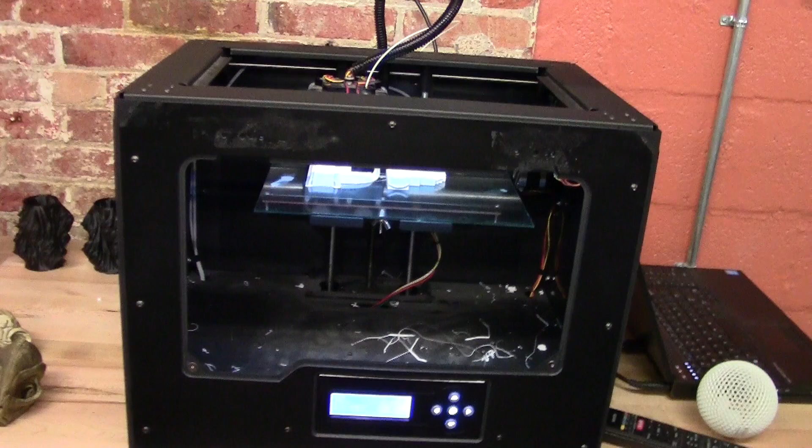So you've probably heard about 3D printing from a family member, a friend, or in the media somewhere, and you've heard pretty much everything. You've heard that 3D printing is going to change the world, it's going to disrupt industry, and we're going to talk a little bit about the realities. What really is 3D printing?

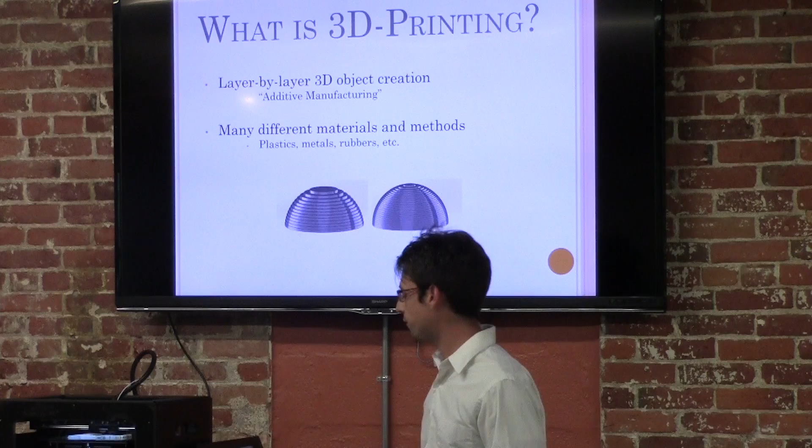3D printing is just a kind of buzzword. It's a catch-all term for a bunch of different additive manufacturing processes - additive manufacturing versus subtractive manufacturing. With subtractive manufacturing you can start with a solid block of wood, metal, or plastic, stick it on a mill, and chisel away material to end up with your final prototype. With additive manufacturing, you add material layer by layer to produce your final model.

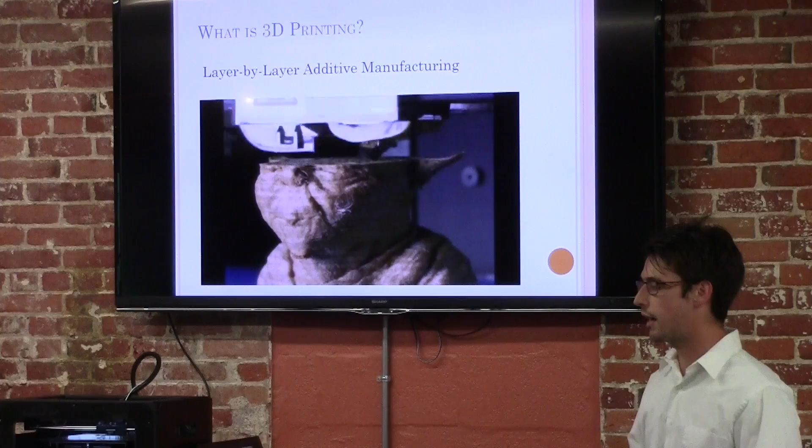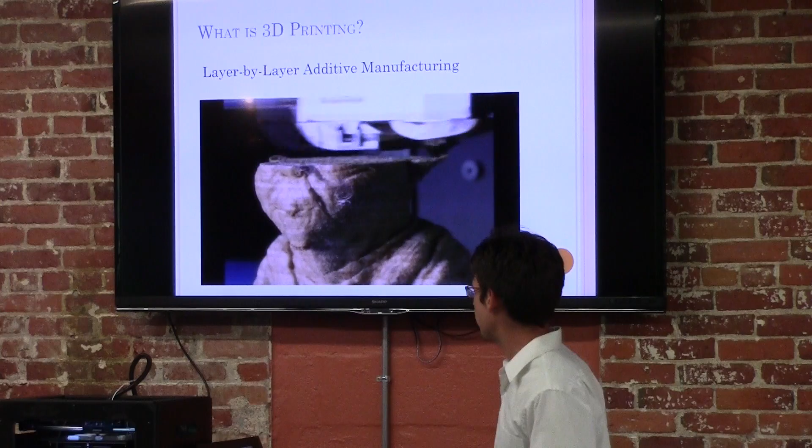So 3D printing is just a catch-all term for a bunch of different additive manufacturing processes that print layer by layer - you're adding one layer right on top of another. In this demonstration video, you're seeing a printer very similar to this one. It's highly sped up, and you're seeing it lay down layer by layer on this Yoda bust to fully build up the model. It's been sped up probably about 100 times or more - 3D printing is not particularly fast.

So why does this matter though? What's the big deal about 3D printing? Well, because creating precise three-dimensional objects with a lot of different design features has traditionally been incredibly difficult and takes a long amount of time. So with 3D printers, you can, with one tool, produce almost any geometry that you can think of. Maybe not any geometry, but almost any geometry that you think of.

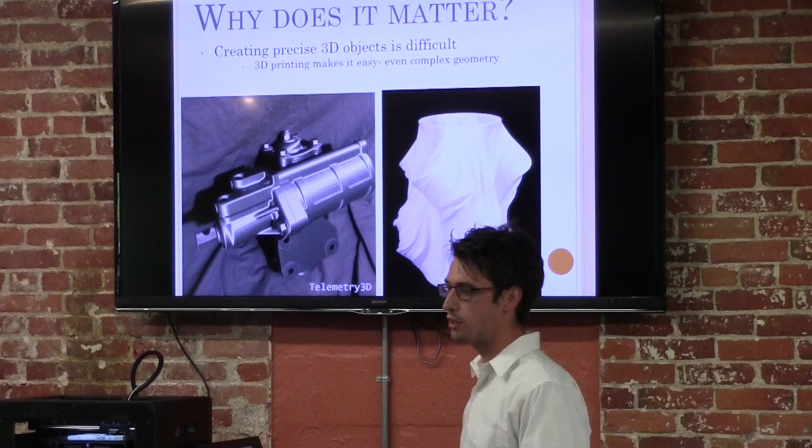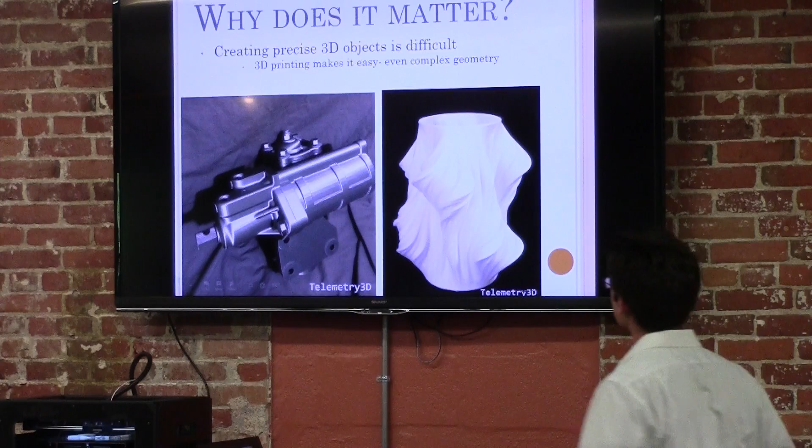So before, where you would need dozens of tools and dozens of technicians to produce a functional prototype, you can now do that with one machine, with one skilled operator. And you can print high amounts of detail with these printers. So things that you could only do by hand in the past, you can print with extreme amounts of detail with the various processes.

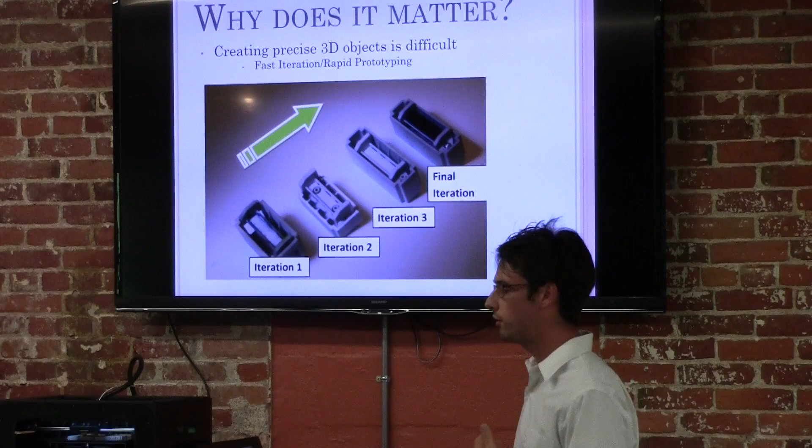So again, why is 3D printing important? Well, the most important aspect of it is the compression of the design cycle. So before 3D printing, you would come up with your design, you would send it out to be prototyped, and it would take several weeks to get your models back, only to find out that you missed a design feature that needed to be fixed, and then you fixed it, sent it back, and a few more weeks later you got your prototype again.

Well, now with 3D printing, you can come in on Monday morning, you can make your design. If it's small enough, you can get it started Monday night, walk into the office Tuesday morning, and you have your first iteration done. Oh, you made a mistake. You fix it, you get it printing again. Wednesday morning, you've got your second iteration. Maybe by Friday, you've already got enough iterations, you've got a final model that's ready to go for being made into injection molds. So 3D printing compresses the design cycle, and it's accelerating innovation by allowing people and companies to move a lot faster.

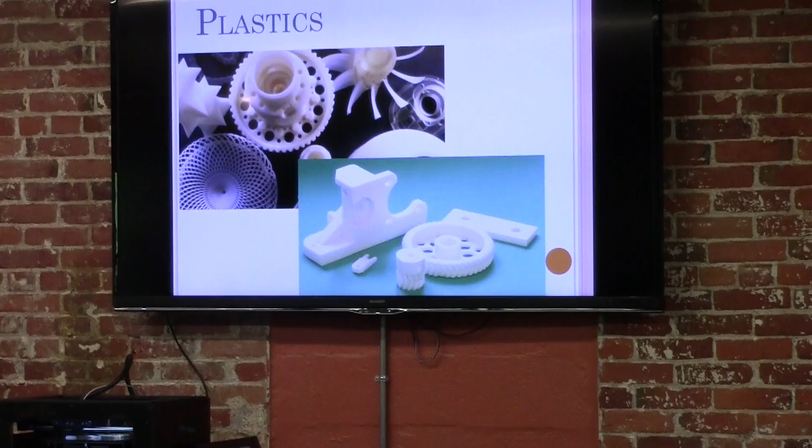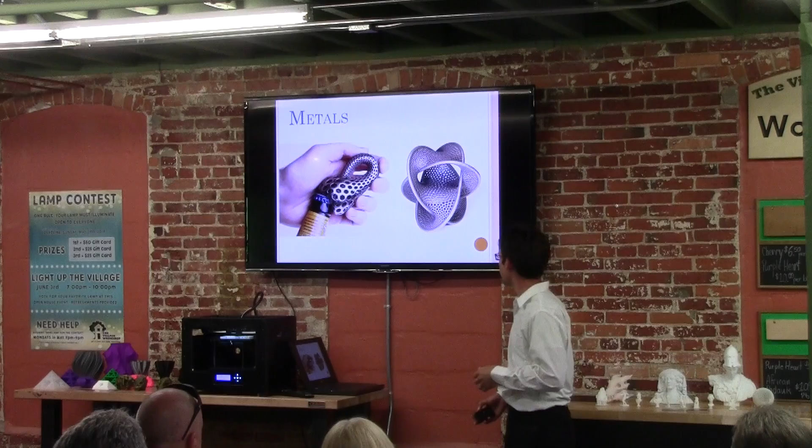So 3D printers now can print into a large variety of materials. What you'll probably be mostly interfacing with are 3D printed plastics. All of the examples that we have here today are 3D printed plastics. And there's a wide variety of plastics that are available for 3D printing, and they all have their own strengths and weaknesses and their own specific chemical properties. You can also print directly into metals with a metal sintering printer that uses powders and a high-powered laser to sinter metal powder together. So you can print directly into metal, flexible materials.

People are actually learning how to print collagen and the materials in the extracellular matrices to print the structures of organs, which are then seeded with stem cells and placed in conditioned media to try to actually grow functional organs. And people are even making 3D printers that can extrude concrete and create concrete forms and actually build houses. That's a little bit larger of a format, but it still kind of falls within the realm of 3D printing.

Now, there are a large array of processes that fall under the umbrella term of 3D printing and additive manufacturing. But broadly speaking, there's three processes that they fall within, and that's selective binding, selective solidification, and selective deposition. So let's take a look at those.

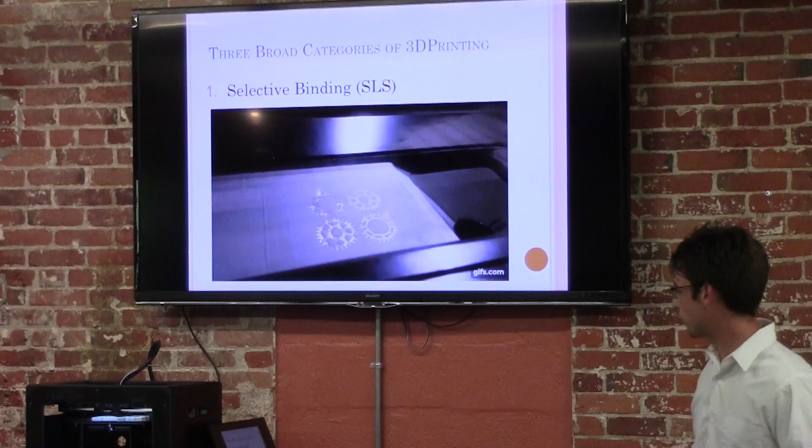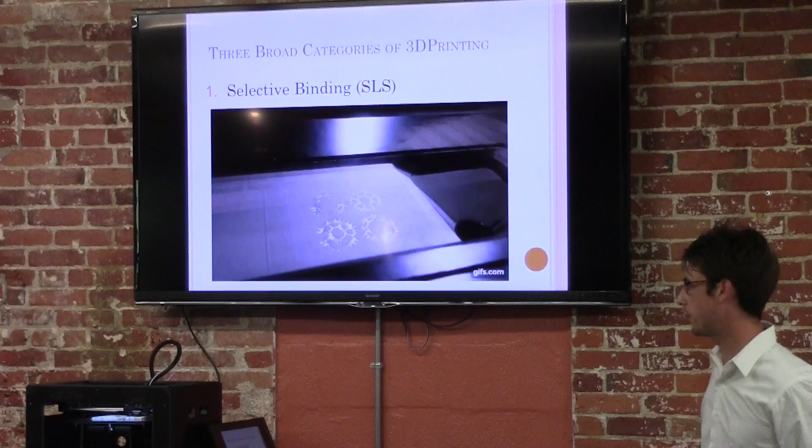So with selective binding, you're generally going to be starting with a thin layer of powder. It can be powdered plastics like nylon, it can be metals, it can be titanium, there's a large amount of different powders that you can work with. And then a high-powered laser comes along and it fuses those particles of powder together. And then the machine spreads out another thin layer of powder, and then a high-powered laser comes again and sinters the next layer to the previous layer. And it does that until you build up your final model.

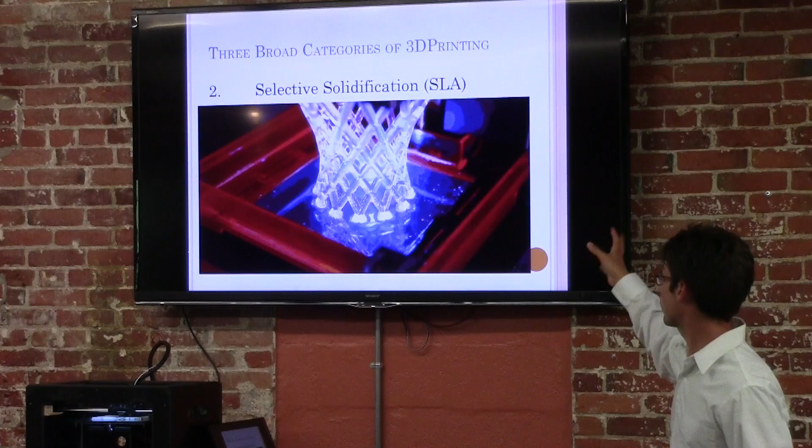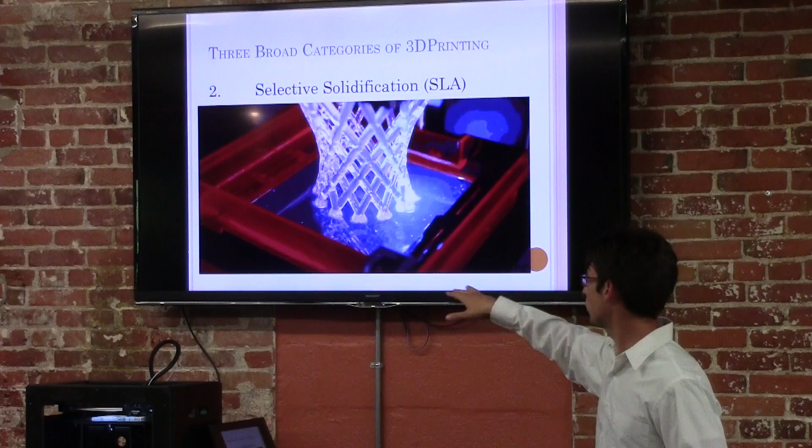So that's selective binding. Selective solidification, a stereotypical process for that is SLA, stereolithography. This is actually the first 3D printing process that was patented, in 1984. What it does is it uses a UV laser to cure a liquid resin in a vat. So it's selectively curing or selectively solidifying layer by layer by layer.

And then there's selective deposition. This is what you're probably most familiar with. This is the sort of technology that this printer uses, fused filament fabrication or fused deposition modeling. It just uses a plastic filament that is pushed through an extruder and through a hot nozzle, and then laid out layer by layer to build your object.

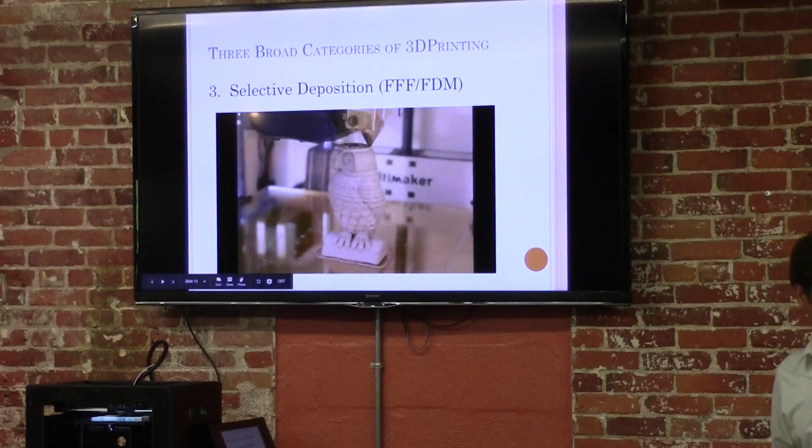So I said that 3D printing falls under 3 broad categories. Well, there's so much development that's going on in the field that's not exactly true. It's generally true, but it's not exactly true. There's new 3D printing technologies that are being developed all the time, including 3D printers that actually take pieces of paper to create your 3-dimensional object.

So it'll take a piece of paper, it'll cut a tool path around it, put a small layer of glue on top of that, put another piece of paper on top of it, and cut out another tool path. And it'll repeat that process until you've produced an entire object made out of paper. So there's going to be unique strengths and weaknesses to each of these technologies. And that's something you're going to want to consider if you're thinking about using 3D printing in your workflow.

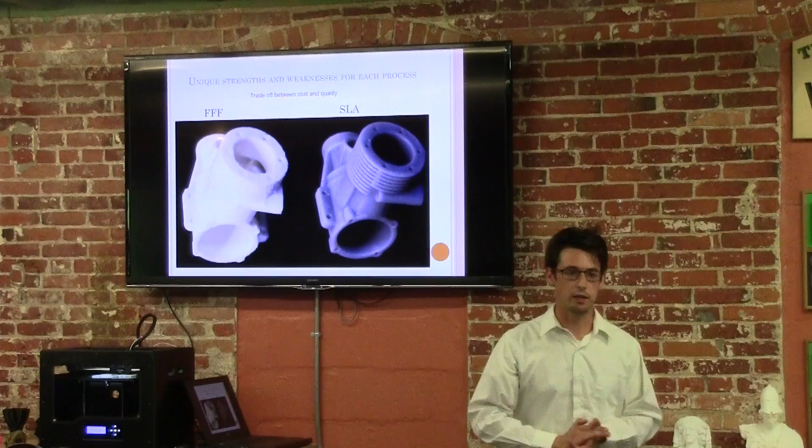Because obviously there are technologies that are available at every price point. So if you don't have a lot of money to spend, you might want to go with a lower resolution prototype until you've worked out your final design. So there's strengths and weaknesses you're going to want to consider between the different methods. And then within each technology, you can often choose the resolution that you want to work with. So lower resolutions will print out a lot faster and tend to be a lower cost, but obviously you start getting some layering artifacts. So it's something that you want to consider.

So again, it's building up layer by layer by layer. The more layers that you have, the finer details that you can resolve, but the longer it takes, and therefore usually the more expensive the parts become.

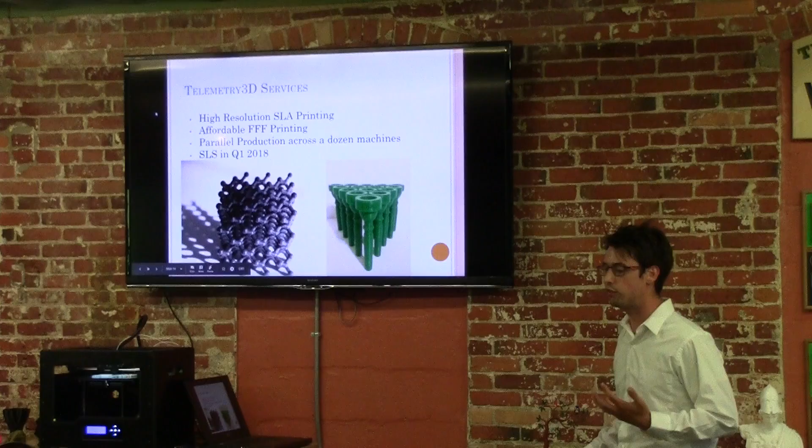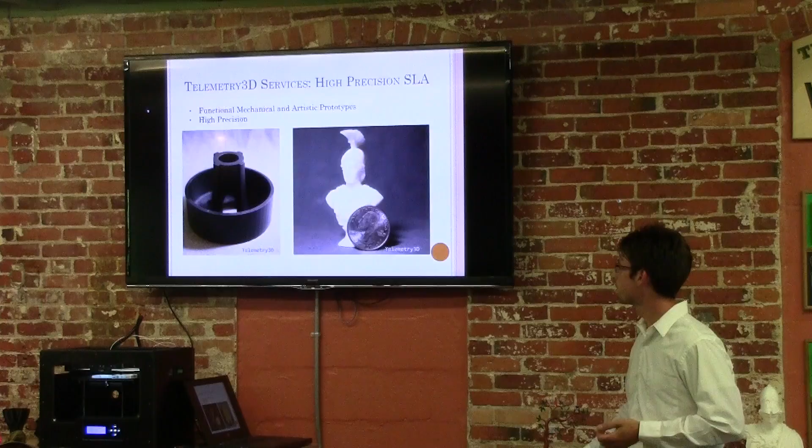So at Telemetry 3D, we offer high-resolution SLA printing services and affordable fused filament fabrication services, and our SLA is great for functional mechanical prototyping and high-precision artistic models. Our fused filament fabrication services are fantastic for very large mechanical models. It's a full prototype of the steering column there. But fused filament fabrication actually is really nice for small models as well. It just can't resolve the tiniest of details.

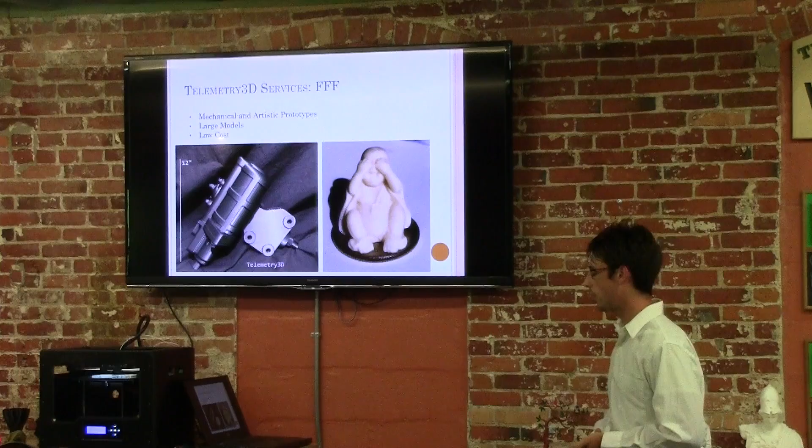So I'm going to go ahead and hand it over to Dan here. He's going to talk from a design perspective. Thanks, Josh. Hi, everybody. My name is Dan Ingerer. I'm with Brainchild Engineering. We're a product design and engineering service. We actually have our office upstairs. And we use Telemetry 3D a lot in our prototyping process to turn around parts really quick. In fact, we're going to be using this part tomorrow morning.

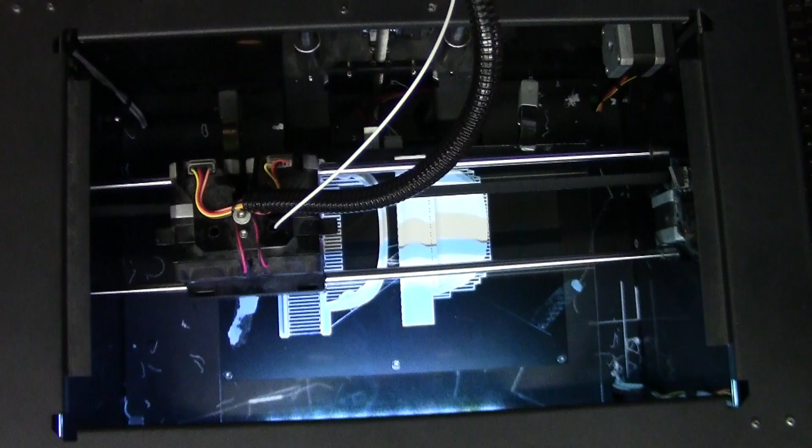So as much as we really love 3D printing, I wanted to talk about some of the limitations. Because right now you're probably thinking like organs, houses, what can I not print? Can I go make myself a toaster or a Rolex watch? So why can't you do those things? And I wanted to illuminate some of those challenges.

So first of all, one of the challenges is multi-material. So in your standard household products like a toaster, you've got maybe 5 or 10 different materials. You've got the thin sheet metal on the outside, plastics, the copper wiring, maybe a circuit board, all kinds of stuff. And currently, as it stands, you can't quite make all those materials in one print. You have specialized machines that can do plastic extrusion, selective laser sintering for metal, but currently there's no machine that can do it all just yet.

Now, that's constantly evolving and changing. There are printers out there that can do plastic and rubber-like at the same time. So, of course, ask me again in 5 years, and maybe you can make a toaster. But currently, it's not quite the Star Trek replicator kind of thing.

Next, material properties. So strength, for example, say you have a gear set, and gears are oftentimes heat treated because just normal plain mild steel is not quite strong enough. So you'll send the parts through a furnace and change the outer surface into an extremely hard material. You don't get that with 3D printing. You're not printing individual molecules, and that's something that's in the works, but again, not quite there yet with the technology.

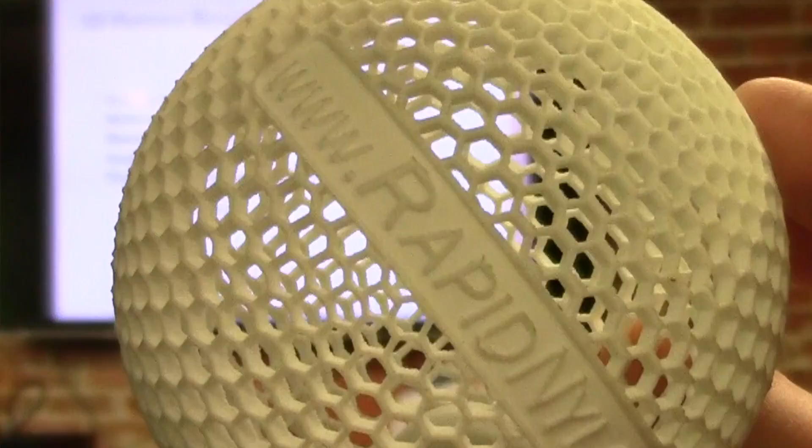Finally, assembly. So for example, say you have an object that has springs inside it. You can't just print a complete assembly in one sitting. For example, when you're assembling springs, you need to start out in the free state and compress it down so that the spring actually has internal stresses to give you the spring force. So if you were to print a spring in its compressed state, it wouldn't actually spring back. It would be stuck, if that makes sense.

So finally, 3D printing, as you can see, is somewhat slow compared with mass production processes like injection molding, casting, forging, all kinds of dedicated processes. They're much faster. Once you make the mold or the tooling, you can crank out parts maybe 1 a second or more. So 3D printing, that's the trade-off. There's an extremely low barrier to entry. You just get a 3D printer for a few hundred or $1,000 and you're making parts. But it takes hours. Whereas with, say, injection molding, you spend $10,000 on a mold for one little part, but when you need to make 100,000 a year, you can't sit around and wait 5 hours for one part.

So while we really love 3D printing and we use it literally every day of the week, we're farming out parts, people asking us, hey, we have this small plastic part, we need to make one tomorrow. It's great for that. It's not the be-all end-all, but again, 10 years ago, 3D printing was nowhere near where it is today. You can get a printer like this for less than $1,000 and make parts in your bedroom. So, again, 5, 10, 15 years from now, who knows where we're going to be. But I just wanted to bring a little reality to things.

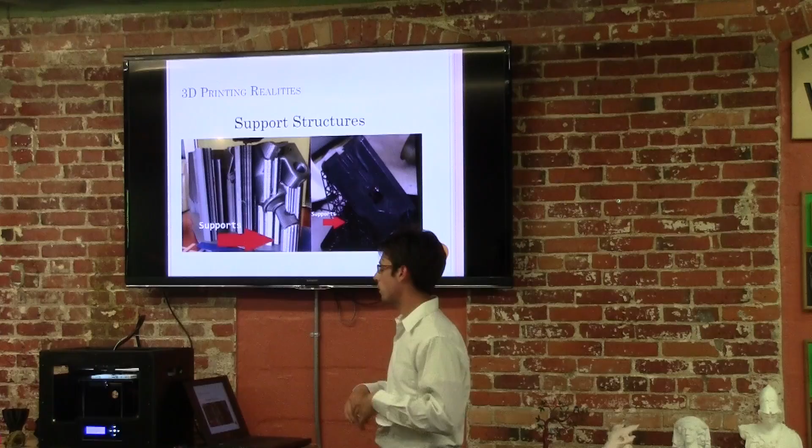It's going to fail. So you have to actually print support materials underneath of it, and those support materials have to be cleaned off and they can leave scarring. And so that's something you're going to want to consider if you're doing a lot of designing for 3D prints and sending prints out to shops: if you've got really intricate structures, which we hope that you do, it's going to require a lot of support material to be generated. And you have to pay for that material and it costs a lot of time. So if you can think in terms of layers, you might be able to incorporate that into your design in such a way that the parts don't even require support material, which produces prettier parts quicker and much less expensive.

But it's okay if there's some scarring on it, because most 3D prints are really amenable to being post-processed. So if you need to sand them, you can sand them, you can prime them, you can paint them, you can clear coat them. You can do pretty much everything you want with 3D printed parts. So yeah, this part right here was actually a really low resolution model that we printed out that was then sanded, primed, painted, and then clear coated. And you can't really tell that it's a really, really low resolution model.

So that's about it. I hope that this was informative, and I hope that you guys are walking away with some information that